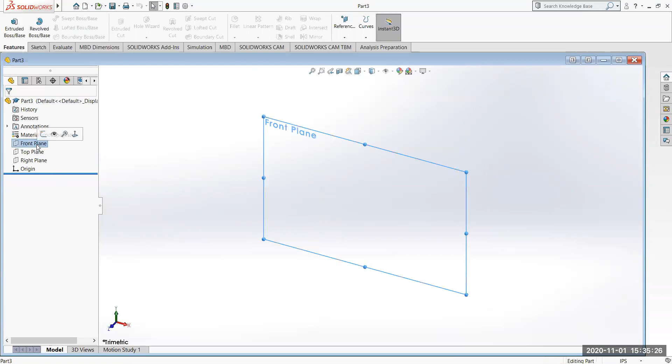All right, so let's start a new drawing, start a new part in SolidWorks. And I'm going to start on the front plane. Turn that front plane towards us. Start with a sketch, start with a circle, and start it at the origin.

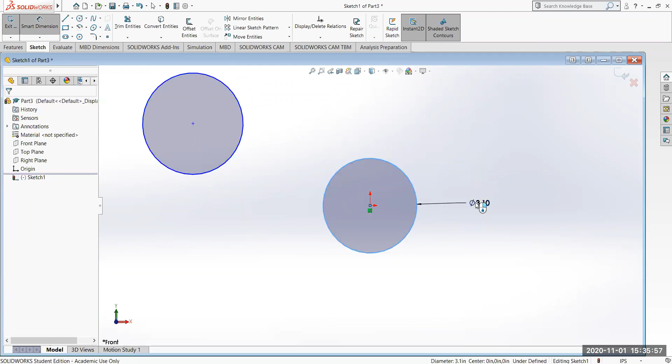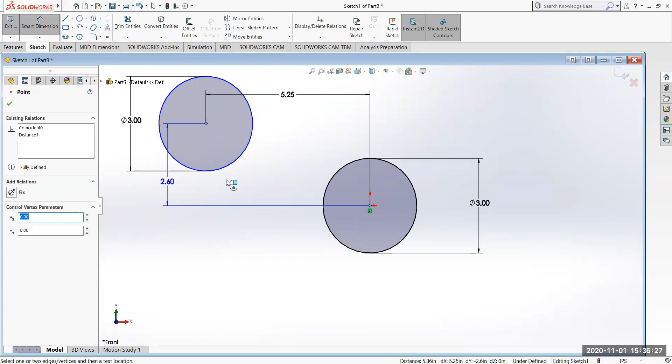And I'm going to draw another circle up here somewhere. Let me dimension these things. Diameter on this should be 3. Diameter on this should be 3. The distance from center point to center point this direction should be 5.25. And from here to here, this direction should be 1.5.

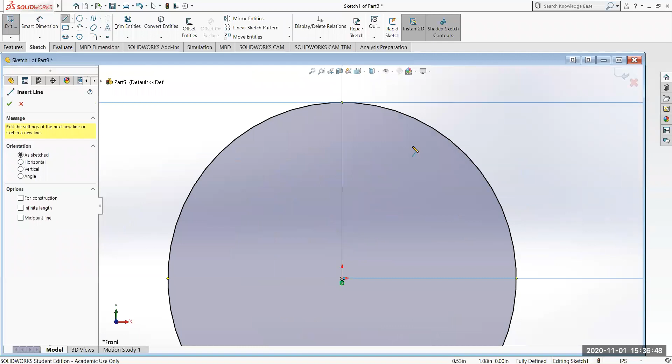Okay, then I'm just going to draw a line from the top edge of this circle here. And if I put my mouse on the edge, you notice it gives me a little yellow dot at the top edge there. I'm going to come straight over to that orange dot there. Hit escape to break out of that line.

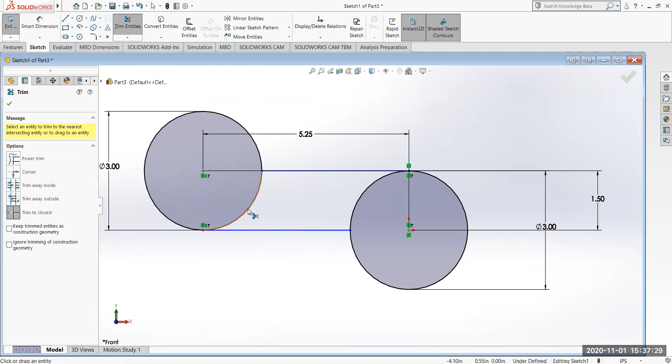Get the line again. This time I'm going to come from this bottom straight across to that quadrant point. And escape again. And now I'm going to trim off the inside here and the inside here. So I'm going to get the trim, select trim to closest, and then get rid of this little piece and this little piece. Good, so we have this solid now.

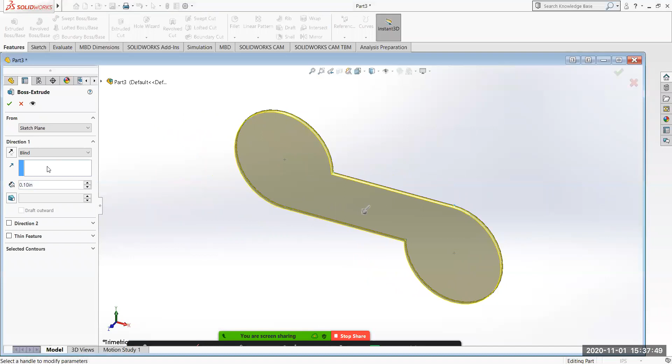Perfect, done with that. I'm going to exit the sketch, and make sure that it's highlighted again. Feature, extrude, and I believe it's a 1-inch extrusion. Yes, so this is going to be 1 inch. And check mark.

Very good. Now we're going to go back to this face and we're going to drill those holes using the same center point. Those holes are a 1 1/4 diameter.

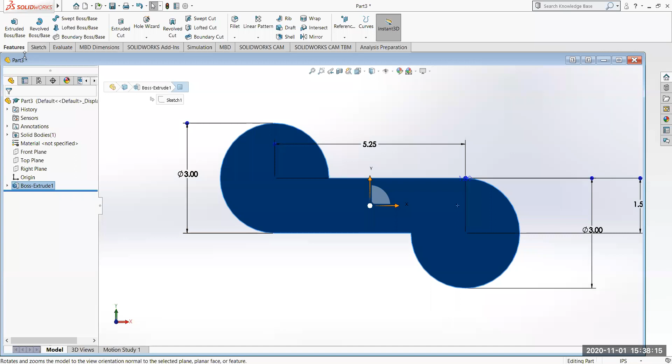1 1/4 diameter. So let's go sketch, circle. I hang out on the edge here for a second and then come in here. There's my center point. Just to double check, I always like going out to the edge to make sure that I really am at the center point. Do the same thing over here.

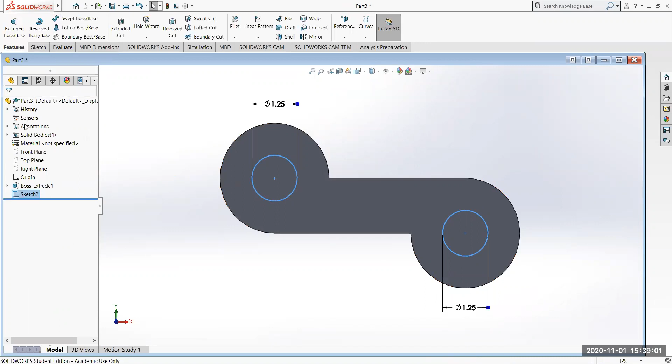And done with that, so this should be 1.25 diameter. And this one should also be 1.25. Good, and we'll be done with that. Exit the sketch, highlight it again, and features, there's extruded cut, and we're going to go through all. There's that cut through all.

Now, what I'd like to do is create that little extrusion that comes off the side here. What I'd like to do is create a plane perpendicular to this face right here, parallel to, let's see, this right plane. But I don't want it here. If I click on this right plane, I don't want the plane here. I want it to be over where that little bump sticks out the side. So I'm going to show you the picture again so I can explain it.

Okay, so on our picture, remember we started with this point as our origin, and our right plane runs right through the center here. What I'd like to do is create a new plane parallel to that right side plane, but at a distance of 2 1/4 inches back this way, so that I can draw this 3/4 inch radius, or 1 1/2 inch diameter, half circle on the edge, and then extrude it back.

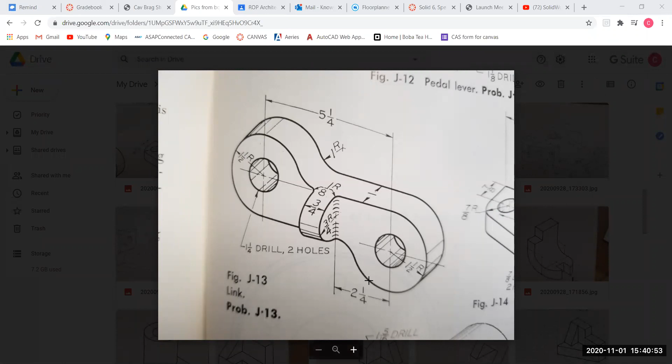So we're going to create a new plane right through the middle here, parallel to the right plane, that runs through the center of this circle, at an offset distance of 2 1/4.

Okay, so to make a parallel plane to the plane that already exists, what we're going to do is I'm going to highlight this plane, hold the control key down, and click on it again. When I hold the control key down and click on that plane, it gives me some information here.

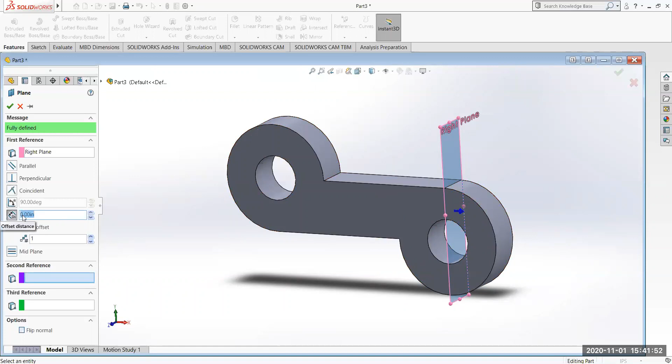What I want to do is create another parallel plane that is 2.25 inches away, offset. So I'm going to change this distance right here to 2.25. Notice mine, when I hit enter, it sent it off this direction, so I'm just going to come back and flip my offset this direction by clicking on this little flip offset.

So what that does now is create a plane for me right where I want to draw that little blip that comes off the side. Okay, so I'm done with that.

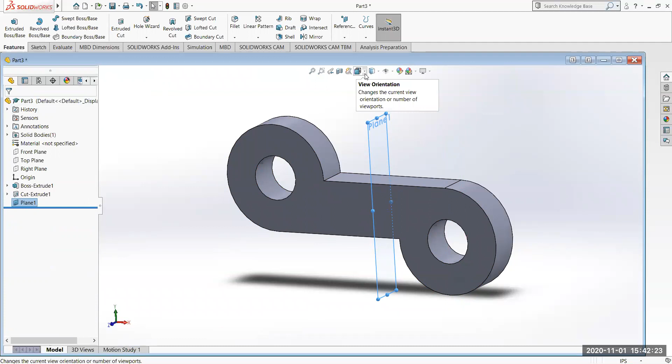What I want to do is, if I click on this view orientation, I can go normal to right here. I want to go normal to that. Now this line right here represents that top edge, the horizontal line that goes from the center of this first circle, or the top of this first circle, over to the center of the back circle. So that's actually the top of my circle that I want to go around like this.

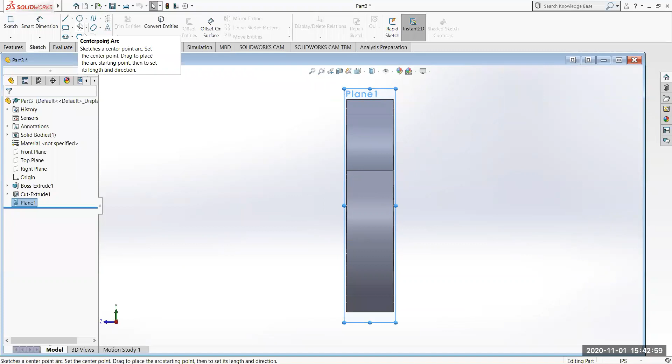So here's how I'm going to draw that half circle. I'm going to create a sketch of a circle, and I'm just going to draw it, making sure that my center point is on this line. Okay, so I'm just going to drag out a circle like that. Done. And I know the size of that circle has got to be a 1.5 diameter.

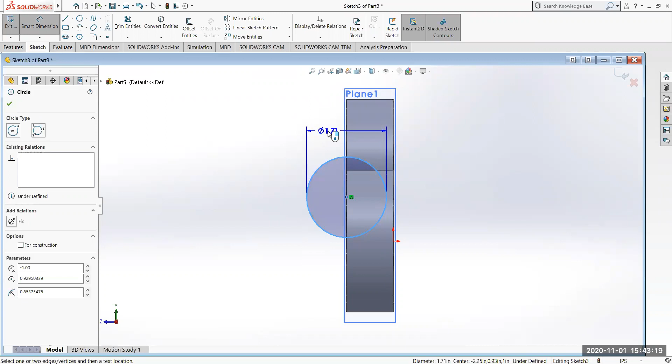Good. And I also want to make sure, let me check mark when I'm done, that the top of this circle and the top corner of this line right here are coincident. Those are touching.

So I'm going to click on this circle, hold the control key down, and go right to this point right here, and click on that point. I'm not quite sure if it got it for me. Let me try this again. Let me check mark, hold the control key down, click on that point and this circle.

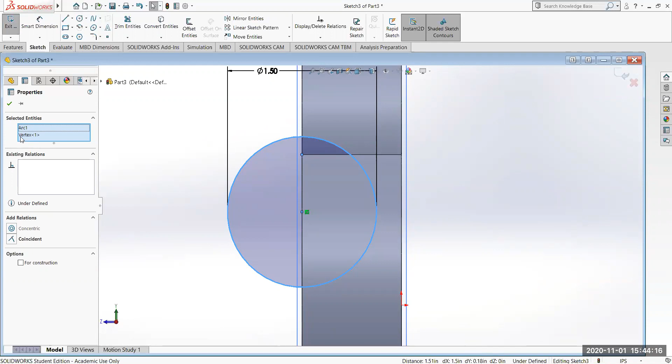Okay, so it gives me the arc and the vertex, and I want to say that I want those coincident. So I put them as coincident. Notice it dropped my circle down so that the top point and the top of the circle are touching each other. Perfect, so I'm done with that.

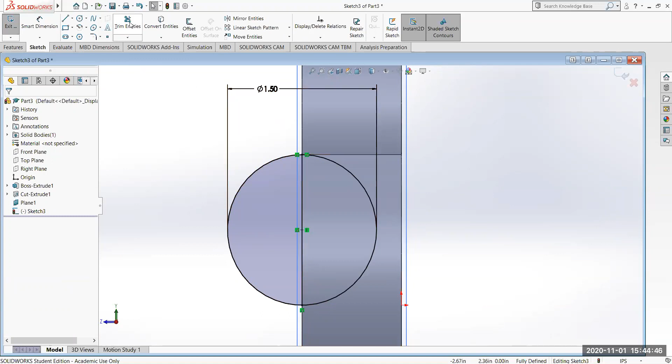Now what I'm going to do is draw a line right from the top of my circle here down to the bottom of my circle. Do the escape, and I'm going to trim off this back half of the circle. So I'm going to go trim to closest and get rid of this half of the circle. Okay.

Now you can see what that gave me. That gave me that half circle right there. The top edge is coincident with the top edge, the bottom edge is coincident with the bottom edge. And now I'm going to extrude this back, so I can exit the sketch.

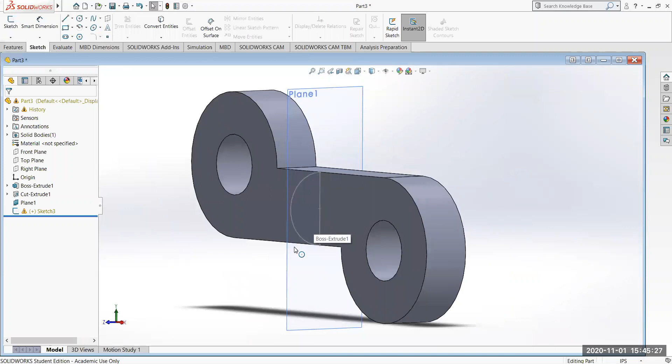Oh, what does it say? The sketch is over defined. Consider deleting some over defined dimensions. All right, where did I over define it? I wonder, let me see what I did. Edit the sketch.

I deleted out the bottom coincident one because I already have this one coincident to the top. The top of the circle is coincident to this top edge, and I gave it a dimension. That should be enough. For some reason, this bottom one was also coincident, so I'm hoping that that will, yeah, because it says here that the sketch is no longer over defined. So let me exit the sketch now.

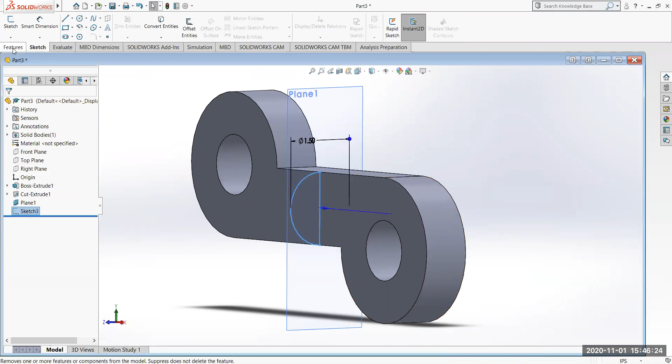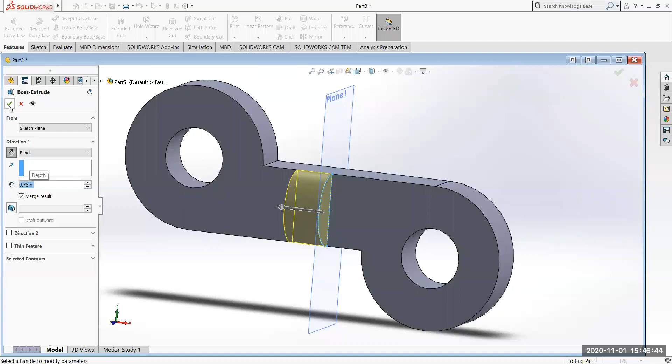Good. I'm going to highlight it here and go extrude boss. And I want it to extrude the other direction. So I'm going to click on this little button right here, and that will flip the direction. And the distance for this is 0.75. And check mark. So there it is. There's that little piece that goes through.

I do need to put in some fillets though. There is a 1-inch fillet on this corner and this corner, and a 1/8 fillet on this corner and this corner. All right, so let's do those. Let's put in a fillet. So I'm going to go fillet. Make sure that full preview is turned on just so we can see it. So the first one is going to be a 1-inch. So I put that in here, 1 inch. I'm going to click on this line.

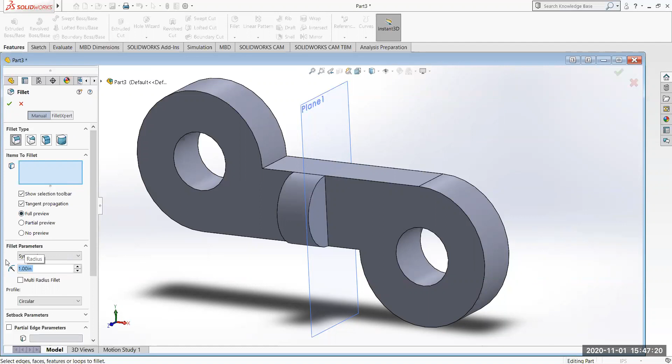Wonder if when I do this, it's the same thing. I don't want that. Interesting. Let me cancel this first. Here's what I'm going to do. I am going to take this line right here. Remember, this extrude boss was this thing right here. I'm going to take this and I'm going to pull it up over top of that. So I'm going to hide it is what I'm going to do.

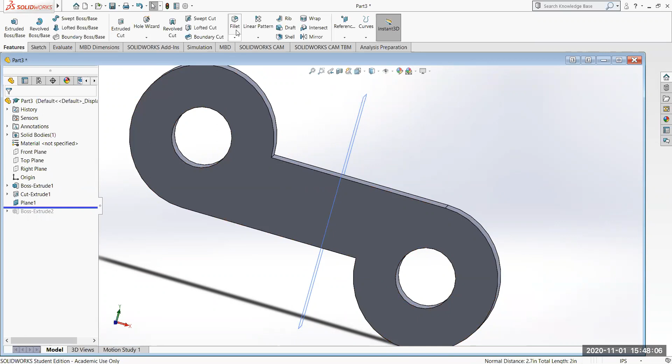Then I'm going to go fillet with a 1-inch fillet. And I'm going to fillet this. And I'm going to fillet this. Okay. And check mark. Now those are rounded over. Now I'm going to grab this line and I'm going to pull it back over top of it, and it puts that back in. You see what that did? It hid this piece for a second while I put in this, and then I turned it back on, and now it's back.

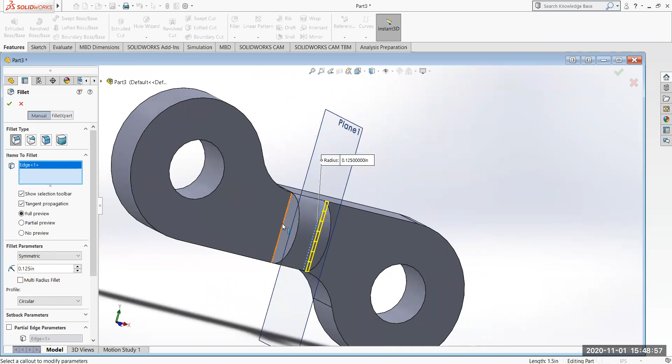So let me do a fillet now at 0.125 or 1/8 of an inch, and I'm going to fillet this piece here, that corner there, and this corner here, check mark. Now those are filleted. Let's save this. This is solid 8.

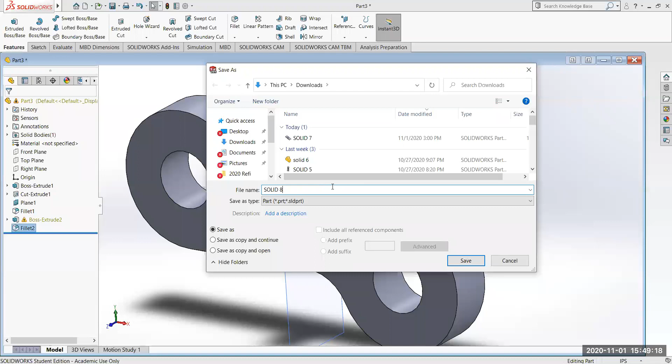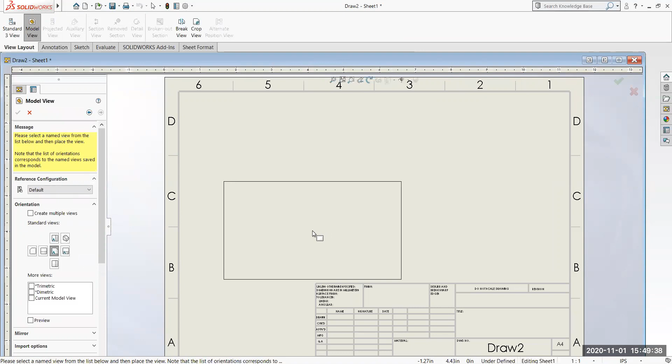Let's create a new drawing, an A4 landscape. We're going to double click on our solid 8. Make sure the front view is highlighted. We'll go front, top, side, isometric, check mark. Pull the isometric so that it's on the page. And we'll put in our hidden lines and center lines.

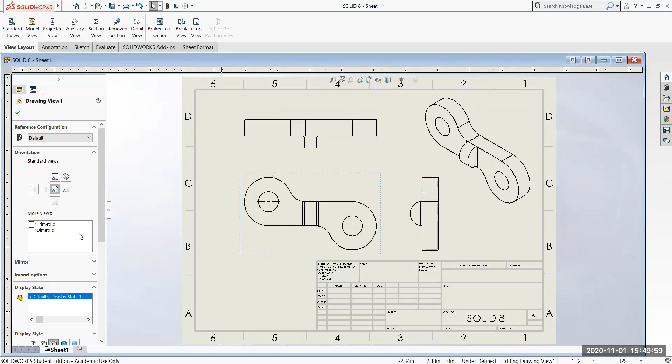So hidden lines visible. Click on the isometric view. And let's put in our center lines as well. I'm going to go to annotation, center mark. And I'm going to click on these big circles. Then I'm going to check mark. I'm going to go to center line. And I want a center line running from here to here. Through. Same thing from here to here. That tangent line gets right in the same location, so it's kind of an issue there.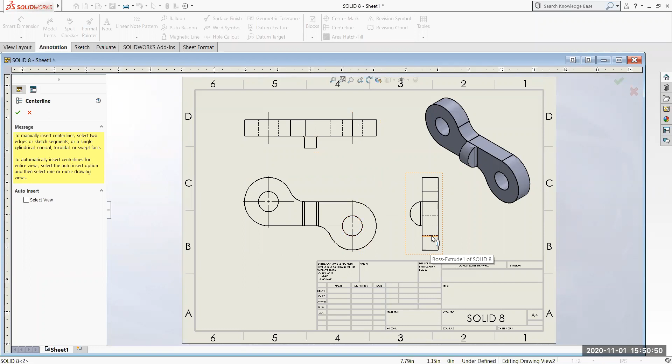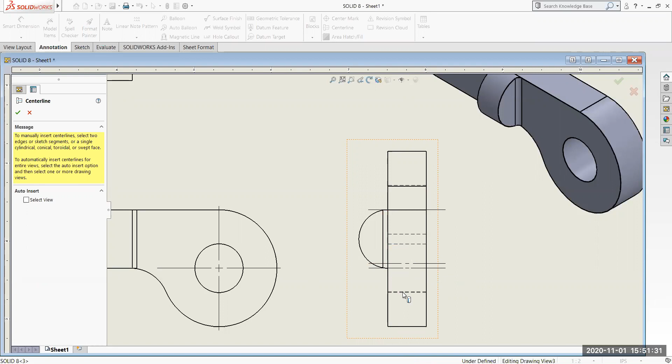We have a center line that should be in from here to here. And from here to here. This one concerns me. I didn't choose the right line there, because this center line should be right even with this line here. There we go. I need to delete this line. Okay. So there is our final product.

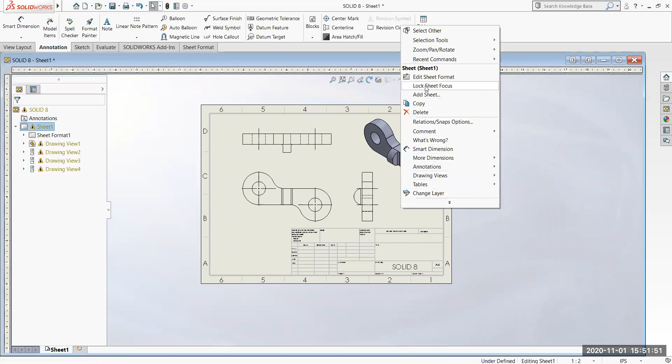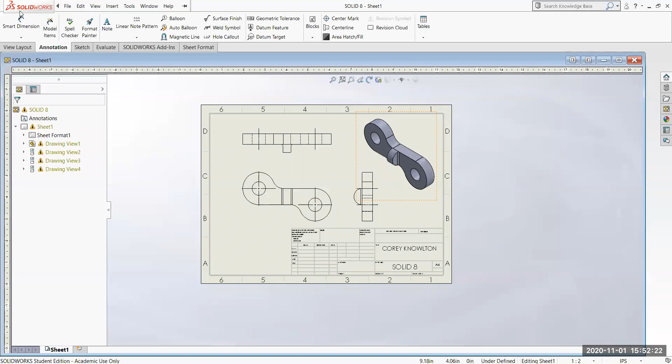And we can right mouse click, edit sheet format, put in our name, highlight it, make sure your name fits nicely. Edit sheet to get out of that. There's your completed drawing. Make sure when you save this, you do it twice, right? We go save it as solid 8 drawing, and then do a save as again, save it as solid 8 as a PDF, and then that's what you're going to submit into Canvas for your assignment. Okay.